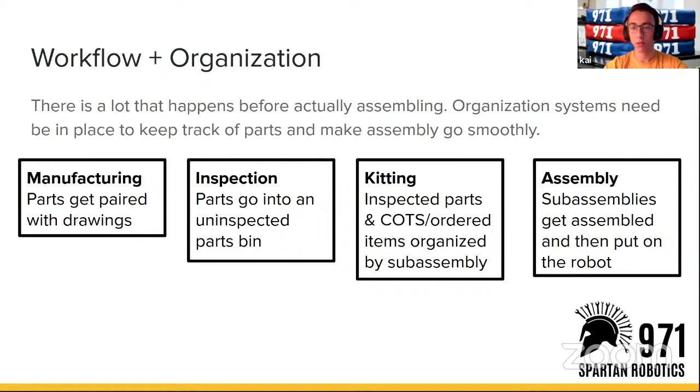All right, so one of the biggest things in keeping organized is using a parts list. This is super important. It's basically a spreadsheet that puts a number to every single part that you make that's not COTS parts, so not screws, not nuts, things like that. In this, it's really easy to keep track of quantity and material type, as well as where the part is in the process of getting manufactured and assembled.

So as you can see here in the picture, there's a bunch of part numbers and part names, and it's grouped in colors. We have red, which is drawings, and then orange, which is CAM, which is preparing for manufacturing as well as manufacturing. Then we have inspecting. Then we also have other information, such as the stock type and the machine that's used to make that.

And the way we like to mark parts is, one, by highlighting, because it's really easy to go through the sheet and figure out what parts need to be made, as well as you sign it off with your initials. That way, if there's ever a question, it's really easy to go back to that person and ask them what happened.

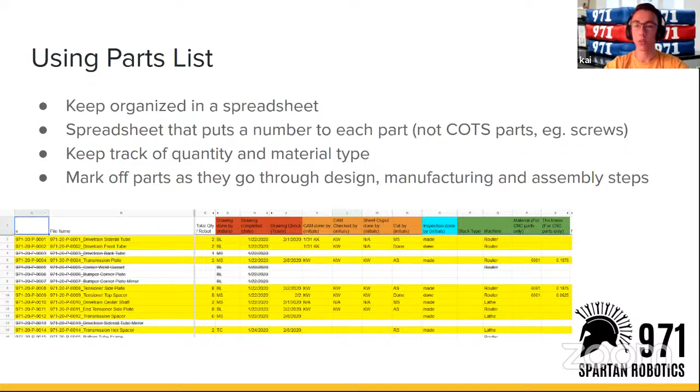All right, next up is drawings and inspecting. A drawing is basically a printout, as you can see in the picture, that shows what the part should measure out to be. We use this to keep organized. We'll often put a part and its accompanying drawing in a plastic bag together. This keeps them from getting separated and makes it easier to keep track of them.

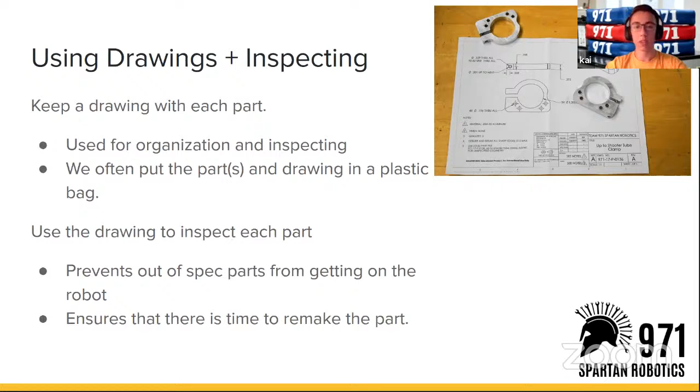After manufacturing, you're going to want to make sure to inspect the part. This prevents out of spec parts from getting on the robot, because you don't want a piece to be too big or too small or a bit wrong, and then it's on the robot and really hard to fix. This also ensures that there's time to remake the part if it's wrong, because if you only realize it's wrong once you're at competition, you can't really remake the part in time. So drawings and inspections, super important.

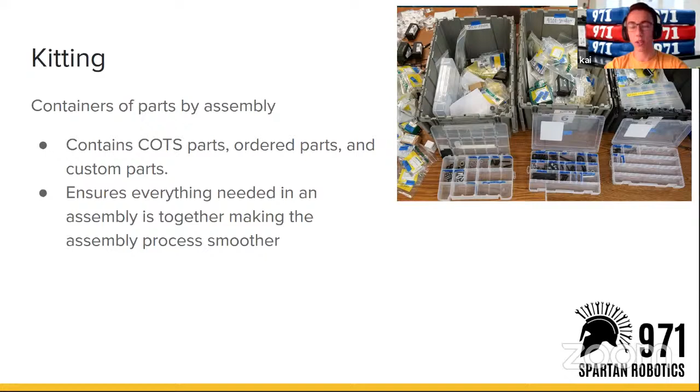Next up is kitting. Kitting is basically a container of parts that we organize by assembly. It contains every single part that you need to make an assembly. This puts everything together, which makes assembly go a lot smoother, because that way you aren't looking for a certain type of screw for 30 minutes, which adds huge amounts of time to your assembly process. So putting everything together in a box while you're manufacturing and receiving all the parts makes assembly at the end go a lot smoother.

All right, next up, we're gonna look at some best practices and techniques that we found to follow while assembling. So the first one isn't quite assembling, but deburring. Deburring is super, super important. The main thing it helps with is safety. It ensures that there's no sharp edges on or inside the robot.

And this is super important because if you're at a competition or something hectic is happening, you're assembling the robot really quickly, and you're getting your hands in, trying to put a screw in deep inside the robot or something like that. You don't want to cut your fingers and get blood all over inside the robot. That would really suck. It's kind of a big problem. So no sharp edges in the robot. We ensure this by deburring the holes.

Now you don't want to deburr everything. So the precise holes, for example, bearings, you don't want to deburr because if you deburr it too much, you take off too much material, then it won't fit anymore, and then the bearing can just slide in and out. It messes up with the fit.

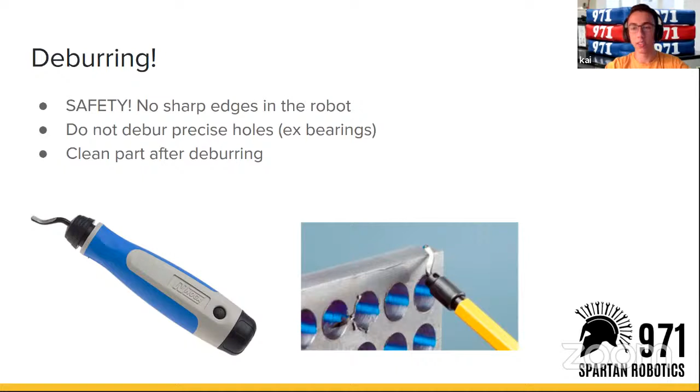Once you're done deburring, you want to make sure to clean the part. This ensures that all the scrapings that you've scraped off, and if you use sandpaper, all of the aluminum dust or whatever doesn't stay with the part. Make sure it all gets cleaned. And that way you have a good looking robot and less likelihood of things going wrong.

All right, one big thing to make sure you never do: don't use a hammer unless you're actually supposed to use a hammer. And that's super rare. There's many problems with using a hammer to assemble anything. The main problem is that if it takes a hammer to put something together, it's going to take more than a hammer to take it apart. This is a big problem because if it takes a hammer to put it together and you can't take it apart with a hammer, it's really, really difficult to take that assembly apart if you ever have to repair it.

Also, hammering shafts, for example, can mushroom the ends, and this makes it really hard to remove the shaft, it might not remove at all, which could be a really big problem if you ever have to repair something. There's a bunch of solutions. As I said, you should almost never have to use a hammer. Whenever you feel like you need to use a hammer, it's normally because parts are interfering. So what you want to do is go through all the parts that aren't fitting together, figure out what's wrong and fix that, and then it should all go together really nice and smooth.

Also, you want to use the right tool. For example, bearings are pressed in a plate, and for that, you want to use an arbor press. You don't want to use a hammer.

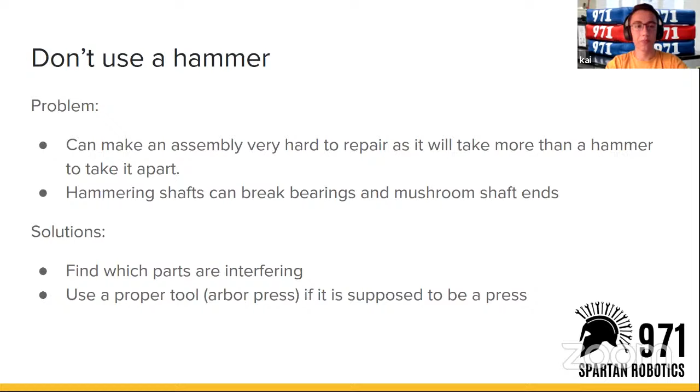All right, moving on to the next thing. We want to keep bolts from vibrating loose. This is really big. 971, we learned our own lesson with this. A screw fell out in the drivetrain in the 2016 competition, and we basically lost the game because of that. So that was really sad. We learned our lesson. We make sure everything is super tight on the robot now.

Now, there's multiple different ways of keeping screws and things like that attached to your robot and keeping them from vibrating loose. One of the super popular ways is using Loctite. Loctite is a type of glue. It comes in a liquid form and a sort of paste form. You can see in the top two pictures. And because it's a glue, it needs to have some cure time. So once you screw something in, you have to wait a little bit before using it. But it's not that long, so it's not a big problem.

Also, with Loctite, if you ever take it out, because it's a glue, you have to reapply the Loctite before putting the screw back together. Because if you take it apart and put it back in, it's not going to have that locking capability.

As you can see in the other bullet points, there's different types of Loctite that are used for different purposes. Blue Loctite is general purpose for metal. And then you have plastic safe. This will not destroy plastic that a bolt goes through. This is really important because if you use normal blue Loctite on a screw that goes through a piece of plastic, it could disintegrate the plastic and possibly ruin your mechanism.

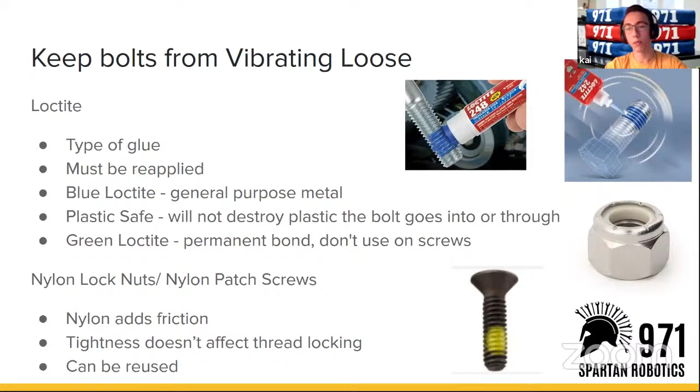All right, next up, we're going to talk about Allen heads and wrenches for Allens. So the Allen head bolts are preferred for robotics as they don't slip or strip easily and are pretty common in shop. And then the wrenches for these Allen screws come in different varieties, different types. These types basically balance access and flexibility with torque, or how much force you can put into the screw to tighten it down. So the main thing is a ball end versus a flat end Allen wrench.

So a ball end has a ball at the end. You can see it in the top right picture. It basically allows you to approach the screw from multiple angles. This is really cool for hard to reach screws that are deep inside the robot, where maybe you can't come at it straight on. And then a flat end is used for higher torque because it doesn't strip as easily. A ball end has less surface contacting, and therefore it can slip pretty easily, stripping.

So what's often done is you use a ball end to start because you get better access, you can go really quickly, and then use a flat end to finish it. That way you can apply a lot of torque at the end and make sure your screw's nice and tight.

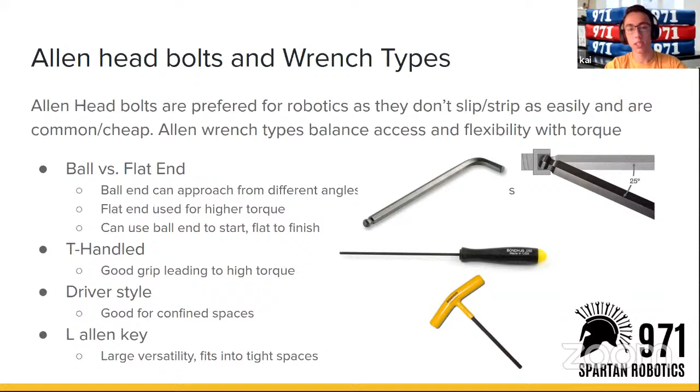Then you have different sorts of handles. You have a T handle, which you can see on the bottom. It has good grip. You can get a lot of torque. You have a driver style. That's the middle picture. It's good for confined spaces because it doesn't have this big T that blocks your way. And then you also have an L key, which is pretty cool because it has lots of versatility, as it has a ball end on one side and a flat end on the other. So it's kind of a two-in-one. It also is pretty small. You can fit in a lot of tight spaces.

Moving on, fiber washers and when to use them. So fiber washers are like thin spacers. They come in 1/32 or 1/64 thicknesses, and then different sizes for different shaft sizes. They're often used to space things off of bearings and other things on shafts. Bearings especially, because with bearings you're only supposed to touch the inner race. If you touch the outer race, you're basically contacting the entire bearing, and then it can't spin.

It's also used to take up play on shafting. So if you have a lot of things on your shaft and they're kind of moving around, they don't have really good tolerance, you can put a few fiber washers on. It'll take out the slack so it doesn't slip back and forth super easily.

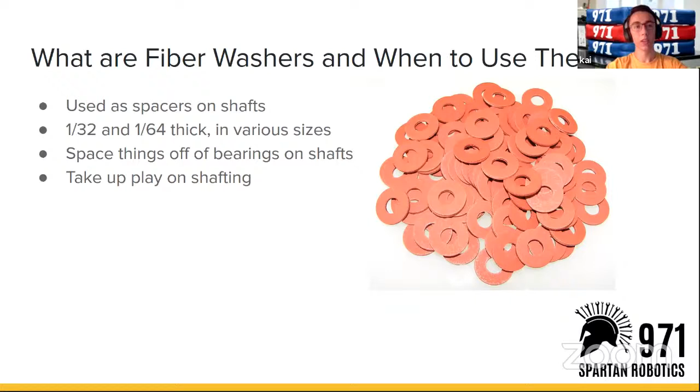All right. On the topic of shafts, snap rings. Snap rings are basically a ring of metal that attaches to the end of a shaft and holds it in place, so it keeps it from coming out of bearings mostly, and other things as well. They have a special tool called a snap ring plier that's used to install them. They come in two different angles essentially, straight on or at a right angle, and that's just for different access.

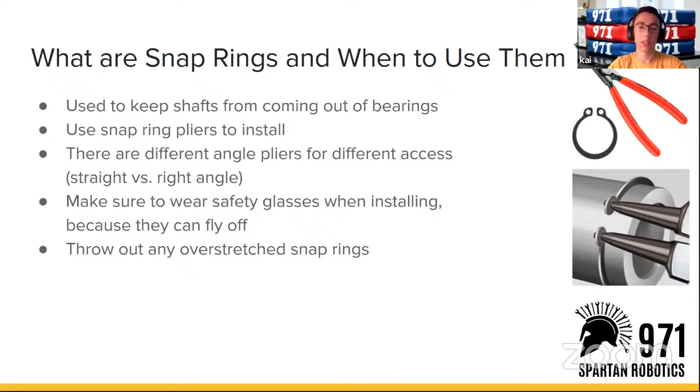When you're installing these things, you want to make sure you're wearing safety glasses. That's super important, as they are essentially small spring metal things that can go flying if they slip out of the pliers. So it's super important that you wear safety glasses. You don't want to get injured. Also, you don't want to ever use overstretched snap rings, because if it doesn't hold snug, then it has a high likelihood of coming off. And you don't want the snap ring to come off because then the shaft can come out too.

All right, next up, we're going to talk a little bit about pop rivets and when to use them. So pop rivets are pretty cool as they are a quick and strong way to join two plates. We on 971 use 3/16 or 1/8 inch diameter rivets with steel mandrels. We just found those to be the strongest for their size and all that. The steel mandrels keep it from getting ripped apart too easily.

So when you choose a rivet, you want to make sure that its grip range covers the materials that are being put together. So as you can see in the top picture, the rivets, they're all the same diameter, but they have different lengths. So this corresponds to different thicknesses of material that they can hold together. So here you can see an example.

If you take an .090 plate and a .060, if you add it up together, that's your material thickness. You're going to get 0.15. And so that means you want to use a rivet that has, in this case, a 1/8 inch to 3/16 grip range. And that just ensures that the rivet is doing its job.

It's a bit better to go over than under. If you go under, then the rivet isn't going to be able to mushroom as much, and then it won't hold your parts together. So if you have to, go over, but try and stay in the grip range. That's what it's intended for.

When you're pulling rivets, that's the act of using the gun or rivet thing to pull the mandrel and mushroom the end, as you can see in the bottom picture. It's called pulling a rivet. You want to make sure to be as straight as possible. This keeps things from breaking off at weird angles. Make sure everything is nice and tight.

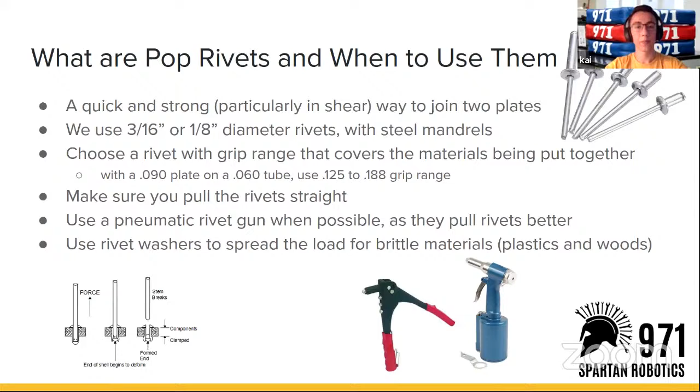Okay. How to properly install bearings. Bearings wear out, and for this reason, we only use new bearings on season robots. That's just something we do. It ensures that all of the bearings on the robot are good and high quality and haven't worn out yet.

When you are assembling a bearing, you want to make sure to double check CAD to determine which way it goes, because often these bearings have flanges. The flanges make it so there is a correct way to install them, because not all plates are mirror images of themselves. You want to make sure to put it in the right way, because if you have to press a bearing out again and then put it back in the same hole, it can mess up a lot of things. It wastes time, it can ruin the bearing, and it can also ruin the fit, so it isn't as tight of a fit.

When you are installing bearings into plates, you want to make sure to only press on the outer race, not the inner race. If you only press on the inner race, it's going to crush the balls in the middle and put contact in between them, and that's going to keep the bearing from turning smoothly. And that basically ruins the purpose of a bearing. So you want to make sure to only press on the outer race when you're pressing in a bearing, or taking a bearing out for that matter.

A little trick that we found: if a shaft does not fit, but it should, you can carefully sand down the shaft a little bit. It works pretty well to make sure a shaft fits in a bearing. You don't want to sand down a bearing because you lose concentricity, so that's how round and perfectly in the center it is. And it's also hardened steel, so it's pretty hard to sand down compared to a normal aluminum shaft.

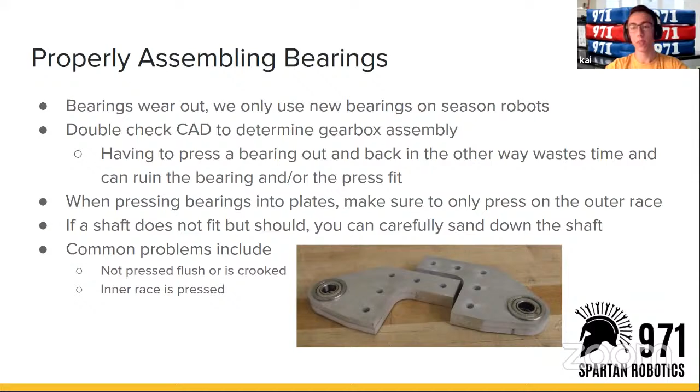Some problems with bearings include if it's not pressed flush or is crooked. So that means when you're pressing it into a plate, it's down on one side, but it's still raised a little bit on the other. Basically, the bearing is crooked in the plate, and this makes it so the hole isn't super straight or perpendicular to the plate. So you can have problems with things lining up if that happens. Also, if the inner race is pressed, as we said before, then you're going to have problems with the bearing spinning smoothly.

All right, our final slide here. Be aware of cross-threading tapped holes. Aluminum is a very soft metal, so you always want to be careful when threading into tapped aluminum parts. It's super easy to wreck a hole in a part that is really hard to replace. So if you're trying to screw something into a robot and the plate is one you machined out of aluminum, if you strip the threads, it can be really bad because you can't really use that hole anymore, and it's really hard to replace that plate.

Cross-threading happens when a bolt is screwed in at an angle or is forced when the threads don't line up. This most often occurs when bolts are put in when the holes don't quite line up, because that forces it to come in at a weird angle, or when you have poor access and need to use a ball Allen wrench, because that means it will come in at an angle also.

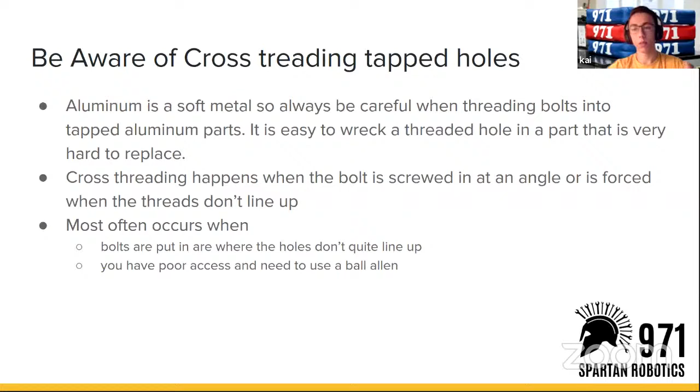The first one is, what's the most effective way to teach new members assembly? Well, I think the most effective way is to get someone that already knows how to do it to watch over and give examples of how to properly install bearings, for example, when you're assembling something. So it involves someone that knows what they're doing to not just do it by themselves, but also involve some new students and show them how it's done.

What's the most challenging part of building a 971 robot? Well, our robots can be pretty complicated, so there's a lot of different parts that need to get organized and put together. We also order a lot of parts that are specialty and super specific for the task, so just making sure we have all of that stuff. This is where kitting comes in with super big importance. You want to make sure that all of your parts are together before you start assembling, just to make sure you have everything. That's a good question.

How does 971 maintain lab organization? Lab organization is really difficult because our lab is pretty small. We always work hard to keep everything organized. I think one of the biggest things is making sure that everything has a place to belong. After a part has been machined, you want to make sure there's a bin for it to go. After it's been inspected, it has a bin to go to be kitted. You want to make sure all your wrenches, all your hammers, don't use hammers, all your snap ring pliers, all your screwdrivers, all that sort of stuff has its own spot, and that you clean up regularly.